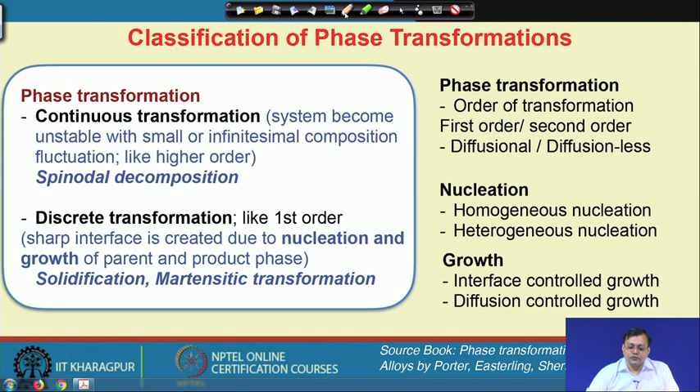So, here we can classify a phase transformation in terms of whether it is a first order transformation or a second order. Second order means that there is no discontinuity in the curve. Like the glass transition I talked about, which is a second order transformation. So, in the enthalpy versus temperature plot, you will not get a sharp discontinuity.

Also, when a product has to form, atomic rearrangements have to be made. Here the atoms can rearrange themselves by a simple shear and make the product phase from a parent matrix or parent lattice, or the atoms can go for a civilian-like motion. In a civilian motion in a street, you can see that each and every person is going in different directions.

So, this is like a civilian, whereas if you think about a movement of the military, there is a group of people marching in step in a particular direction. So, there is basically no relative movement between two soldiers. So, that is like a military type of transformation. A military type of transformation does not need diffusion.

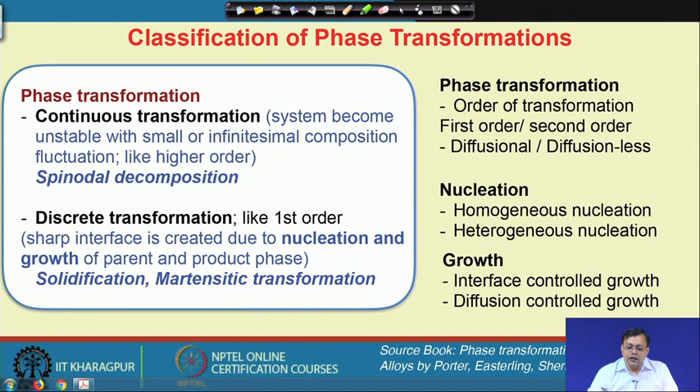So, that growth is mostly controlled by diffusion, and in a Martensitic type of transformation where no long range diffusion is required, only the interface moves. The interface moves and completely covers the whole parent phase, so it becomes interface controlled, and there are many other examples of such cases. So, we will try to classify and identify a phase transformation process in these particular aspects.

Now, let us come to a diffusional phase transformation. A diffusional phase transformation signifies that long range atomic diffusion is required to initiate and to complete the phase transformation. One is the initiation, which is like nucleation, and also the growth. So far, 5 different types of diffusional phase transformation have been observed. These 5 types are polymorphic transformation.

Here you can take a pure metal. A pure metal, the first example is iron. Pure iron, I am talking about pure iron. In case of pure iron, if we go above 910 degrees centigrade, then we will get gamma iron. Gamma iron is the pure iron which has a crystal structure of face centered cubic, FCC.

And now, if we cool it down, then the gamma iron will transform into alpha iron, and this requires nucleation of alpha iron in the gamma iron boundaries, because this is a solid transformation, and here the growth of alpha iron nuclei will occur during cooling of gamma iron. So, this is a polymorphic transformation, where there is no compositional change.

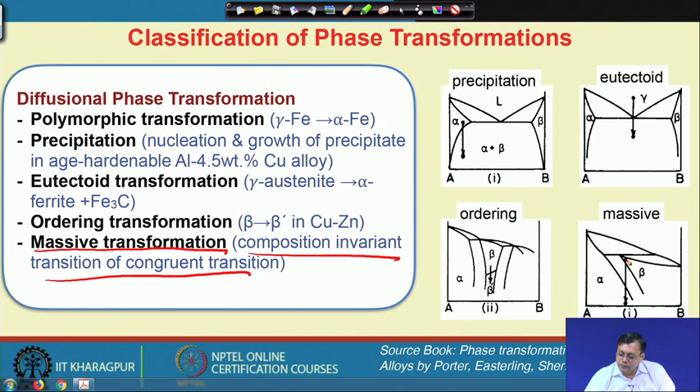One example of such massive transformation is shown here. If we have such a peritectic type of transformation, from beta we will get alpha. However, please take a note that there is no martensitic-like transformation involved in this process. This is a complete diffusional phase transition from beta to alpha. So, this is called a massive transformation, which involves diffusional movement of the atoms.

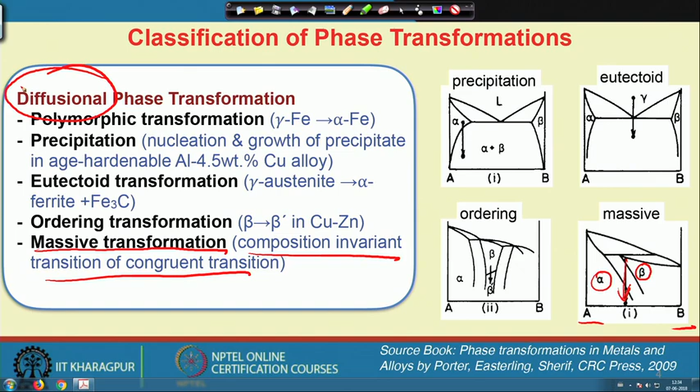Now, let us come to diffusionless or military transformation, which we also call displacive transformation. In this case, a structural change occurs due to a coordinated, military-like movement of the atoms or groups of atoms relative to their nearest neighbors. The relative movement is almost zero.

This diffusionless or displacive transformation could be of many different types, and we will focus on two: martensitic transformation and quasi-martensitic transformation. You may not have heard of quasi-martensitic earlier. Quasi-martensitic is a type of lattice distortive displacement, meaning there is a distortion in the lattice. In this case, the kinetics and the morphology of the product phase are not dominated by the strain energy.

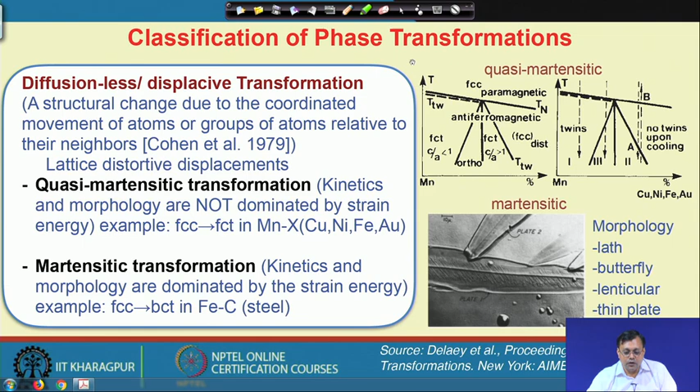So far we have seen in the textbook that these martensitic plates could be lath type or plate type. However, there are also two other types of martensite morphology people have observed. So in total there are 4 different types of morphology observed: one is lath type, another is butterfly type, one could be lenticular type, and another could be thin plate type. This morphology is very important, and it also depends on how these structures evolve.

So let us try to summarize what quasi-martensitic transformation is and what the typical signatures of such a transformation are. Three common aspects have been reported by Delaey et al. There should be a lattice distortion, which is very small and deviatoric dominant, and the change in the lattice distortion is continuous or nearly continuous. The second is that internally there could be a twinned microstructure. Here the twin structure is the substructure in the product phase that gradually builds up during cooling below the critical temperature. And there is mechanical lattice softening of the elastic shear constant when approaching T c.

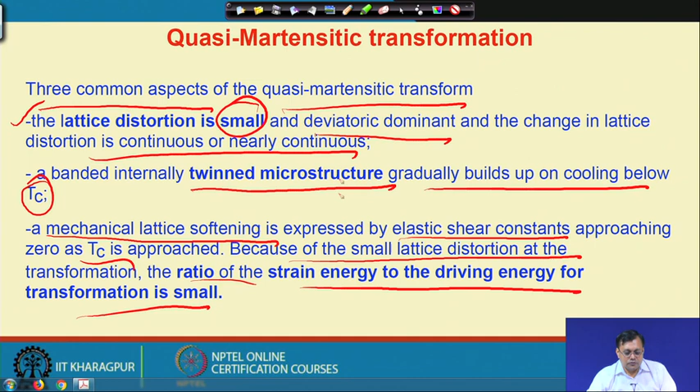However, because a small lattice distortion is involved, the ratio of the strain energy to the driving energy of transformation is very small, and that is the reason, since this lattice distortion is small, the morphology is not dominated by it.

Whereas in the case of a martensitic transformation, there are some typical signatures. What we looked at here is displaciveness, the displacive or lattice distortive type of transformation. In that case, we see a shear dominant shape change of the lattice. So there is a definite shape change involved in the lattice, and diffusion is not required at all. There could be a sufficiently high shear strain energy in the process, which has also been reported by Cohen et al. a long time ago, in 1979.

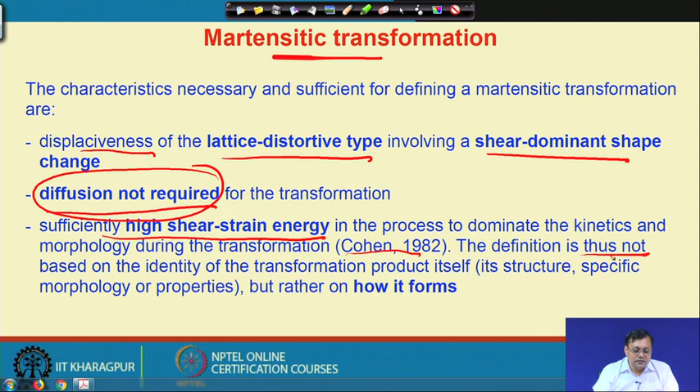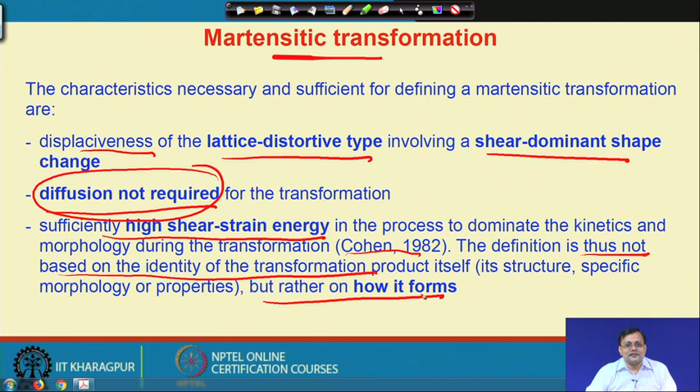So the definition of martensitic transformation is therefore not based on the identity of the transformation product. If you look at a product phase and find twins, you will not automatically say this is martensite. It is not like that; rather it is how the new product has formed in the parent microstructure, and that is the characteristic of a martensitic transformation. Initially you may think things are not very clear, but as we progress you will understand what a martensitic transformation really means.

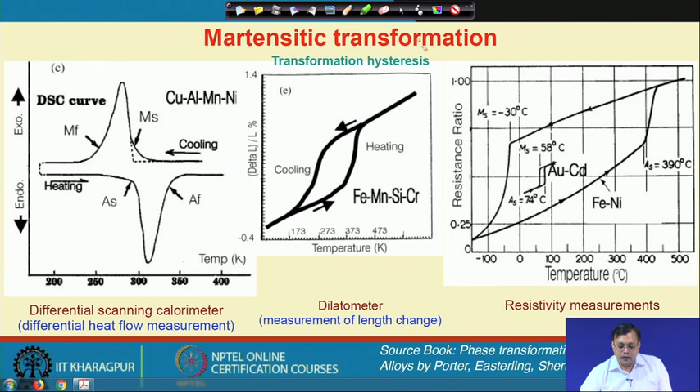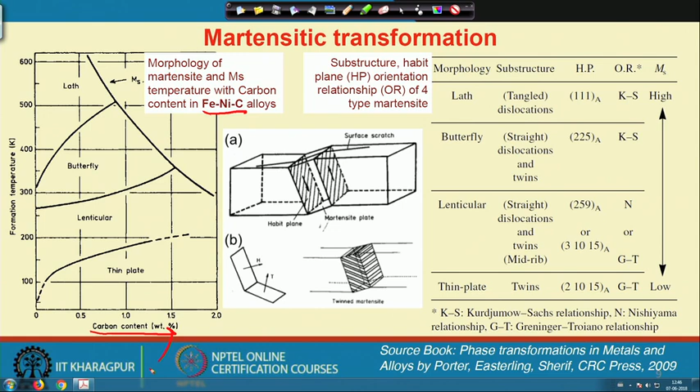However, the morphology of the martensite could also be a little different, and in this particular slide I show you that in the case of an iron-nickel-carbon system, if we change the carbon content and the transformation temperature changes, where the martensite start temperature begins, then we get these 4 different morphologies which I discussed with you just a few minutes ago: lath, butterfly, lenticular or thin plate.

And these different morphologies involve different kinds of substructure. So, substructure means tangled dislocations, or dislocations and twins. So, not only twins can be involved in this process. So, in a lath we see only dislocations, whereas in the case of thin plate only twins are involved.

Now, if we think schematically that this is austenite and this is the product martensite, then the plane which is the interface between austenite and martensite, which remains unrotated and undistorted, is called the habit plane. So, the habit plane could be different in the case of lath, butterfly, lenticular or thin plate. So, this is the direction of the habit plane actually, okay. Or this martensite could have a substructure of twins or dislocations.

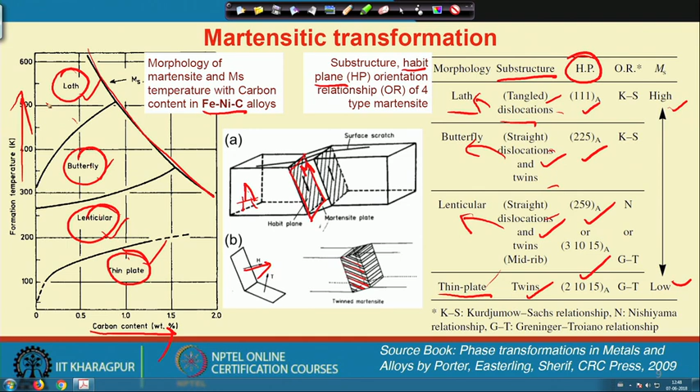Okay. So, there are many different substructures, and the strain energy can change the morphology of the martensite from lath to lenticular to thin plate and so on. So, higher and lower temperatures are involved with these 4 types of transformation. Okay. So, you can see the orientation relationship, or KS relationship, or the Nishiyama type of relationship, or the Greninger-Troiano type of relationship.

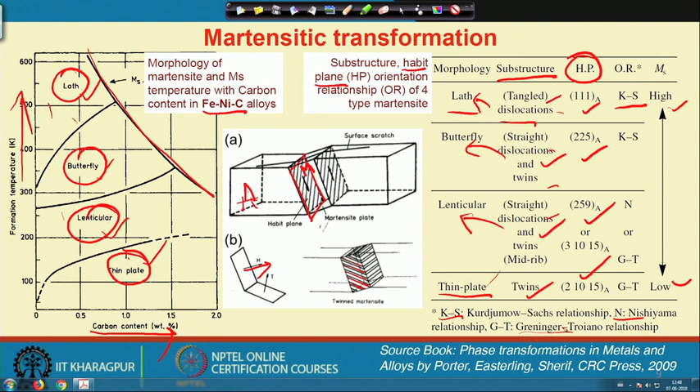There are many different relationships that have evolved, and we can characterize this martensitic transformation with the product and so on. So, in the next class we will continue with this discussion to understand the phase transformation and how they are interlinked with the shape memory effect.